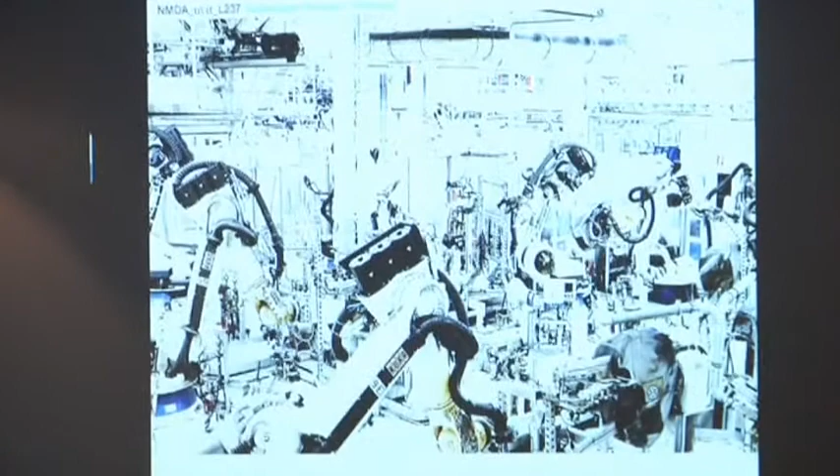Here's an environment, Volkswagen factory in Germany. Think about it. We need to make a car. Here's the series of problems. We have a whole series of machines designed to be able to essentially take care of one element, and it's an incredible landscape. It's almost as crazy and complex as an urban environment. So this is technology deployed to be able to fix or solve for these issues.

Frank Stella, you may know Frank Stella, a famous New York painter. In the mid-60s, he and a number of other painters decided to shape the canvas. And this is the era of canvas shaping. Why did they want to shape a canvas? Well, history of painting was always about the window, and whether it was even representational or abstract, canvases were usually rectangular at some level, as we know. So Frank Stella said, what is the way in which we can make progress in painting? Well, let's get rid of the rectangle of the canvas, get it out of the idea of a window, and make it an autonomous piece.

Culture didn't ask Frank Stella, would you please shape the canvas? It was a problem of painting, and problems of painting have persisted. We don't really know if culture continues to ask painters to paint. I think painters wake up and they paint. Architects can wake up and do architecture. You don't need a client to do that, but there's also this idea of demand involved in architecture. Give me a problem, let me try and deal with it. I think there's a lot of shaping the canvas going on in architecture. And when you sit down and do your projects, you're shaping the canvas too, because you're inventing ideas that culture didn't ask for.

Steve Jobs, you know Steve Jobs. How many read the book? A lot of people read the book, Reality Distortion Field, right? They walk in and go, Steve, should we do market research? He said, hell no. We don't need to know what people think they want. We need to do what we want. And then that's going to create what the world wants. Now that's a pretty strong kind of position. Architects can't be quite that visionary because we don't mass produce products.

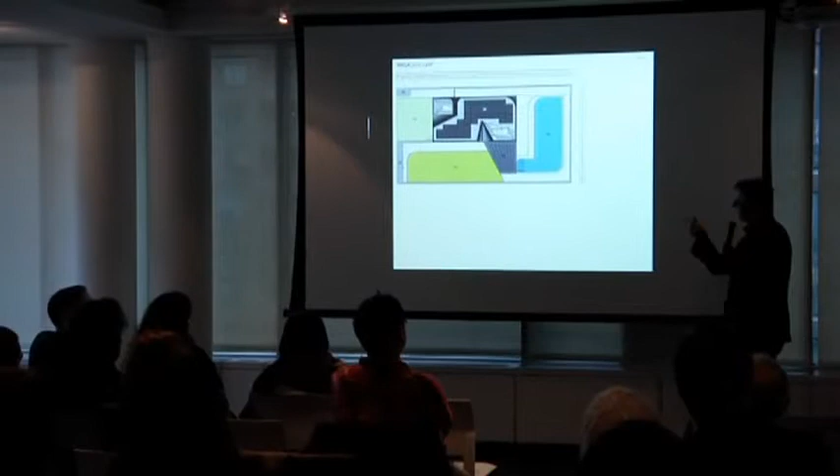Swimming pool, they do their laps. The green bit is actually like a little mini soccer field for them to play soccer. The dad is obsessed with golf. He chips his golf balls and so forth. So that's the roof plan.

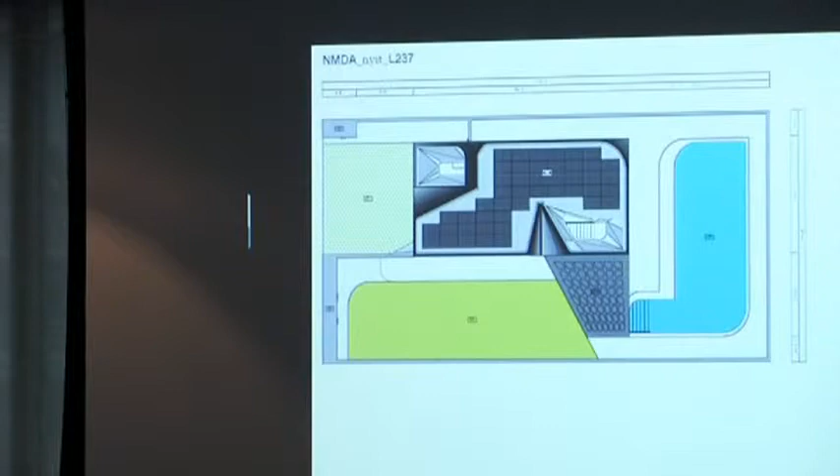The project became a meditation on this small footprint house, 28 feet wide and 30 feet tall and 68 feet deep, and essentially how to carve out as much density and complexity in this house, but really focus on the idea of a window. A window in a surface rather than the idea of a curtain wall or something that's essentially about letting the landscape in.

There's a great view over that wall. There's trees all around except in the back. It looks across a valley to the Getty Museum. Really, really beautiful. Facing east, this is the south facade, and you can already see that we're working essentially with a kind of a carved box mass. And the meditation is on how the windows work in frame views, let in light, both on top and in every kind of facade.

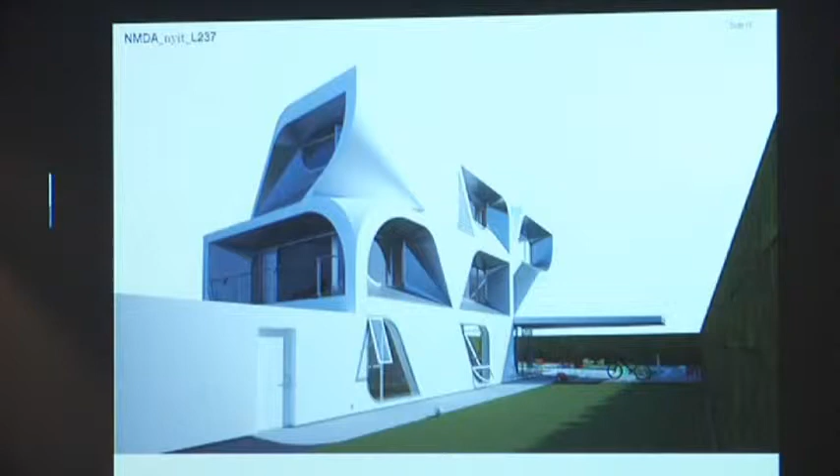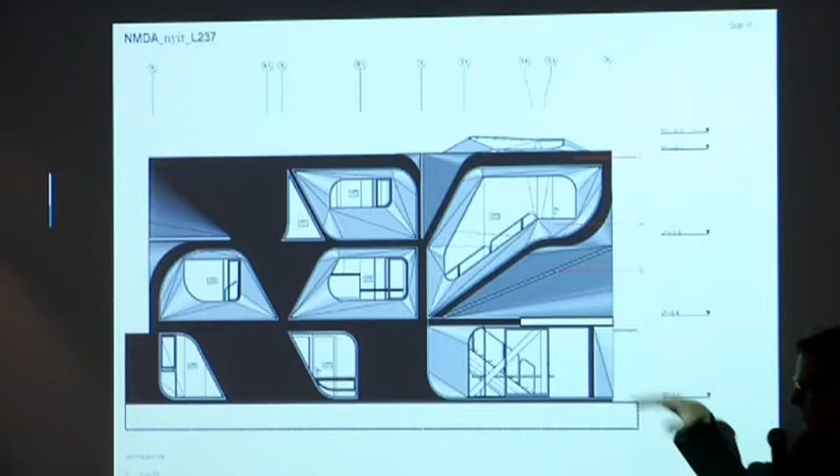And you see the shape of the windows, and the windows in this kind of pockmarked surface are actually smaller than the surrounds of the project. So the impression visually is we want this to seem like the perforation or the aperture in the surface, while meanwhile it's much more limited. So essentially we're opening up the surface of the house, but we're not glazing this area. This is a perforated aluminum rain screen, and I'll show you what that looks like on the inside.

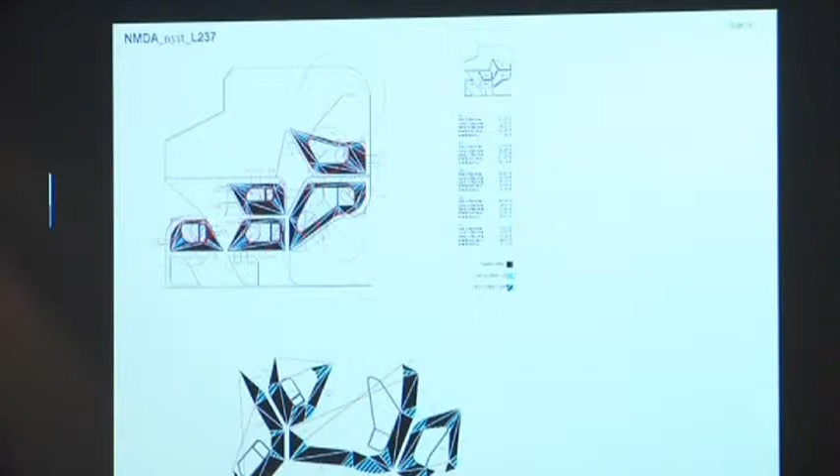The section is the public space on the first 2 floors, and then it simply goes up into the 3rd floor with 3 bedrooms, 2 for the kids and 1 for the parents. And more details of the facade. This is a challenge on the level of structure and framing. There's a lot of steel in the walls.

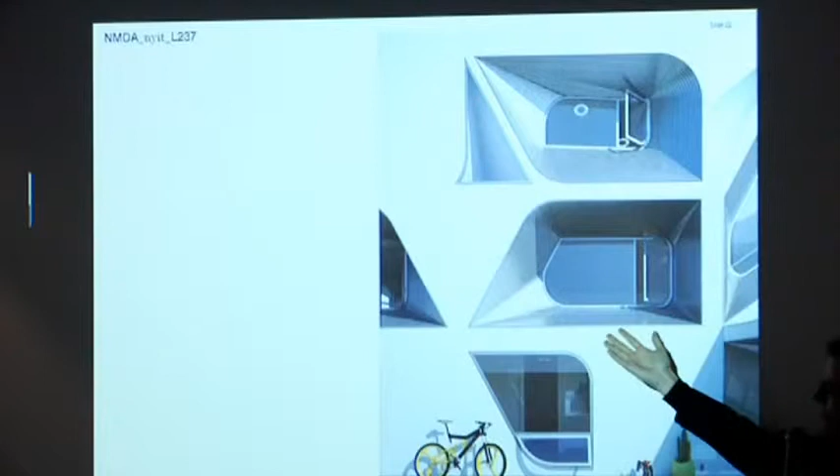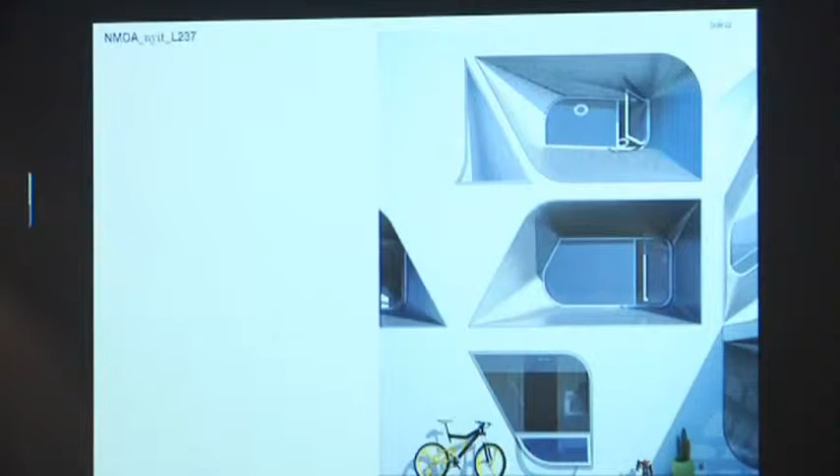The walls are still relatively thin, as I'll show you, but most importantly, it's the relationship between these apertures, the geometry of the apertures. You can also notice that we're working with developable surfaces. We've only got partial conic surfaces. There's no 3-dimensional curving surface, so we can actually fold this stuff out. The main structure of these window surrounds is sheet steel in a wall section that we borrowed from SANAA in work that they've done in Japan. Very, very thin walls. There's a view of the house.

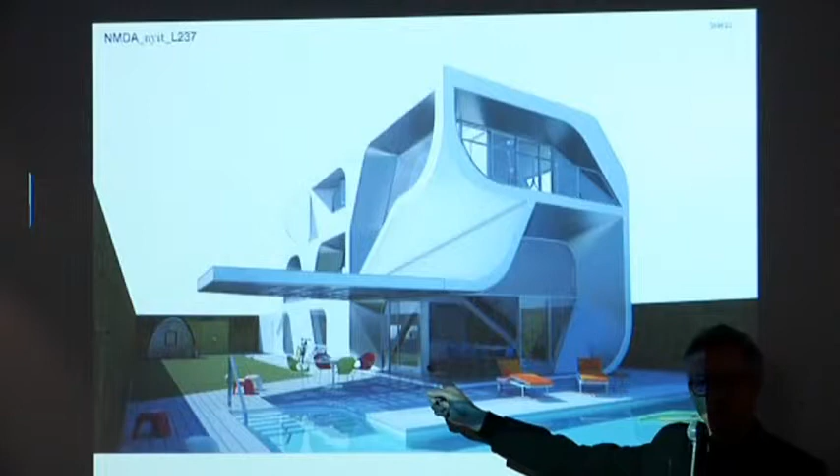So the whole composition of the project, especially here, here's the little micro reference to the glass house as it opens up to the swimming pool. But then the glass house morphs into essentially a window or a partial window that is itself very similar to the windows that make up the rest of the house. So we're really working hard linguistically in the idea of opacity, transparency, and orientation of view.

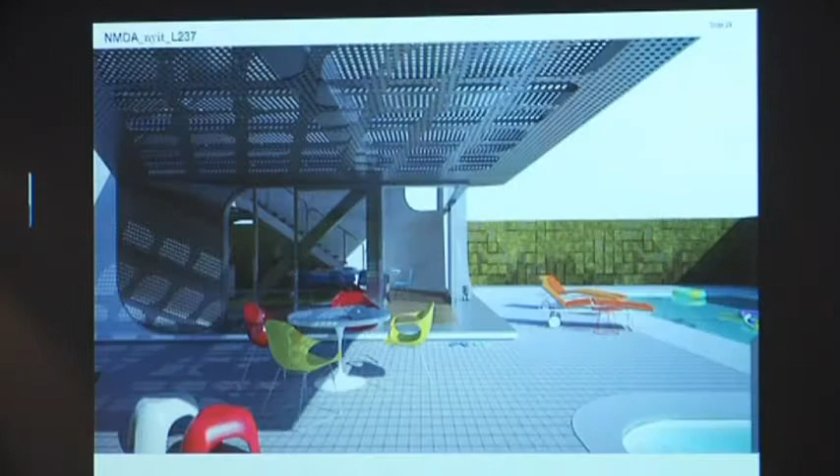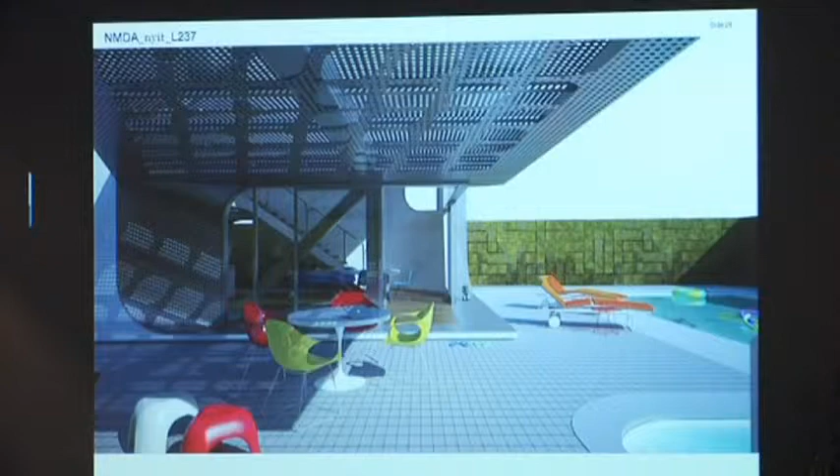That's the parents' bedroom looking out to the east across the canyon to the Getty. You see the bits of life, the MacBooks, the flip-flops, the Gundams, everything floating in the swimming pool. This is what their life is like. Yes, it's a life of privilege, but at least we got them away from a huge 5,000 square foot house. It's really important that we made this smaller footprint project for them.

And views around. This is the interior. That's a stair that goes up to the parents' bedroom. You can begin to see that even though the house is very much like a Japanese house, it's really squished. It's got hardly any void in it. There's a small void, a 2-story space out to the swimming pool.

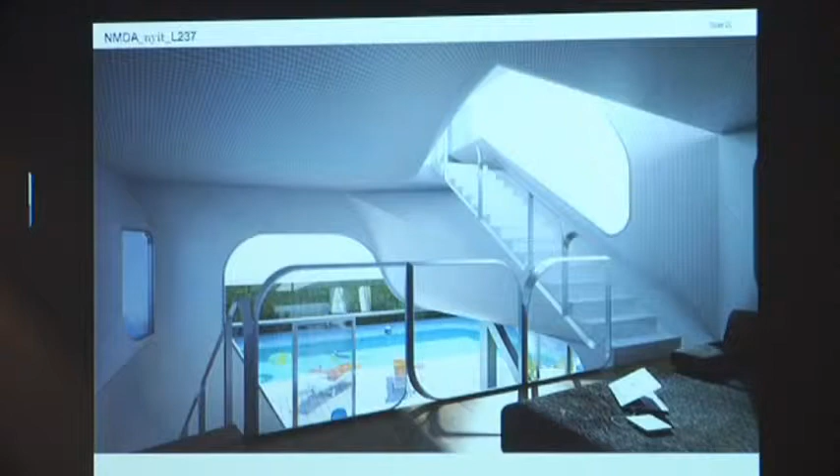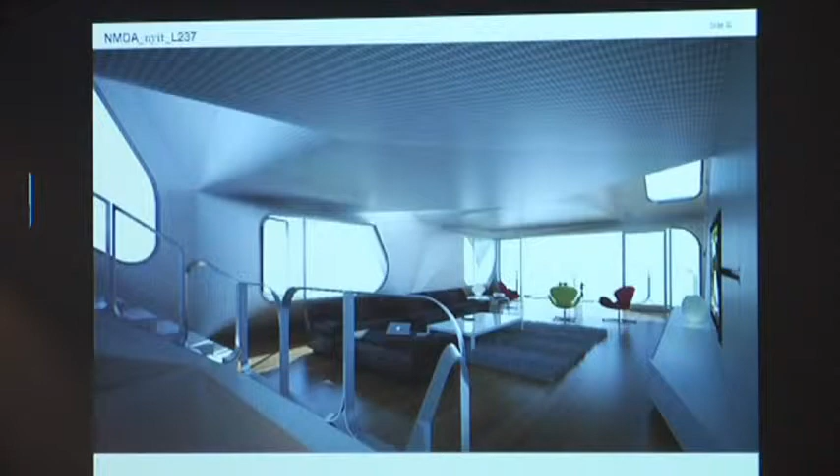But the main thing about the interior, there's the middle floor, it's just a simple kind of public space, is that the morphology of the ceilings and the walls, creases in the ceiling that actually let in a kind of clerestory lighting. And you can see here for the first time that this house actually isn't thick walls, but it's a WYSIWYG, what you see is what you get project. It's not poché, and you can see that really clearly here. So the windows become a kind of impression in the interior, an event, something that's very much bodily engaged.

We had the volume to be able to do that, and essentially create this house as I think effectively, the idea of opacity and enclosure and shaped windows, which are very specifically oriented toward views and letting light in to the house. We even designed a little storage unit mimicking the house for all of the keys and stuff that you usually lose, that sits on the counter in the kitchen.

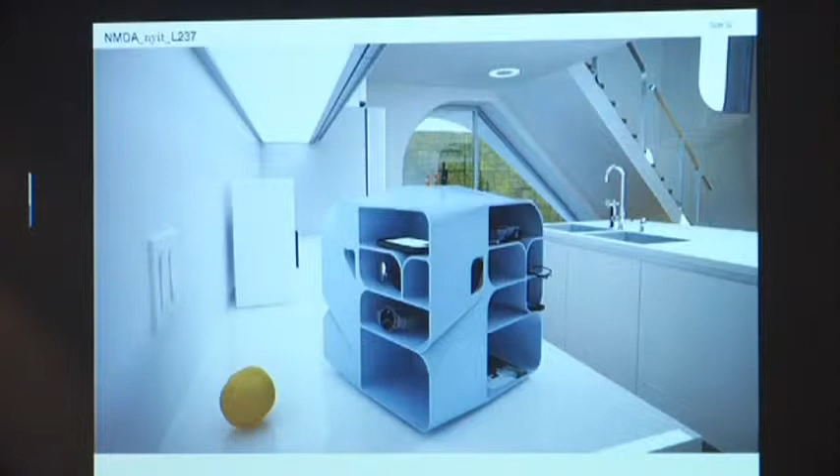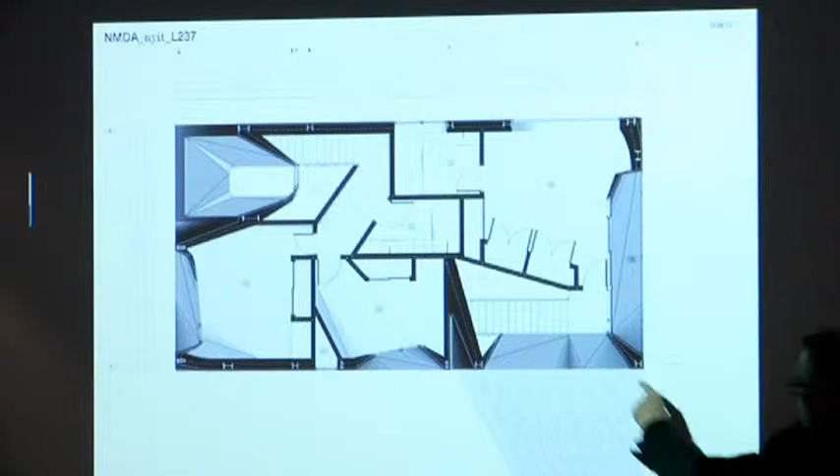And the floor plan is very Japanese in this sort of sense of economy. It's just simply packing the 3 bedrooms and 2 bathrooms up with 2 voids, small voids, towards individual stairs that go up into each end of the house. And there's a view sort of on the center line looking back to the stair down to the 2nd floor, and that's the master bedroom on the right.

Problem number 2, modernism, how to deal with the request for timelessness. Every client, in one form or another, always asks me at some point in the process, how am I going to feel about your project, about our project, in 10 years? It's a curious question. And the question comes out of a little bit of fear, and the fear is, we're commissioning you, and this needs to be a really interesting project, but I also understand something about style. And styles, of course, go in and out of fashion, and if you do something and it has style, well, how am I going to feel about it?

Because everything that I can go through in my sort of personal life, whether it's a car or clothes or books, I can expend them. And I can't really expend this project. I'm buying into it. So the sense of forever, in a funny way, it's a wrenching moment. And so when you think about forever, or if you think about style, there's always a sense sometimes I need something that will remain interesting to me forever. And what is an architect to say to that? And I'm confronted with that all the time.

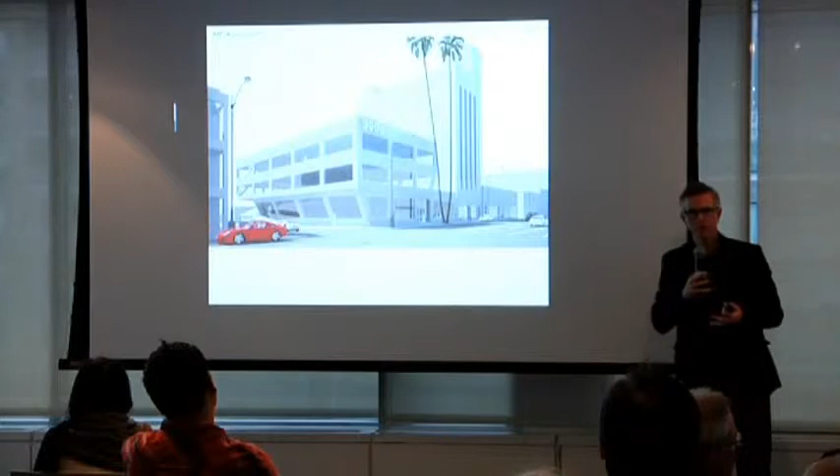So we presented this project. It's shaped by the forces of the site largely because of setbacks, because of conditions of FAR, conditions of the entrance to the parking garage below, et cetera. So this is what we presented, and I was very emphatic about the building being fairly straightforward, fairly brutal in a way, flush glazing, kind of a European project, smooth, Ando-like concrete and so forth. Here you see the cantilever in the back.

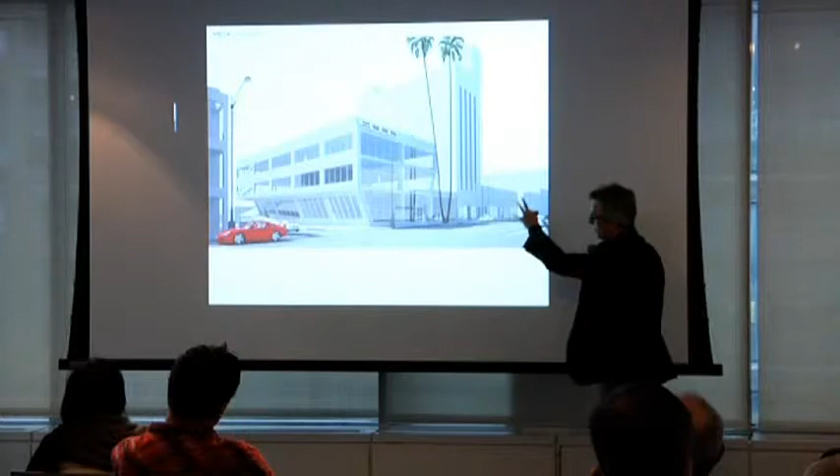And we refined it a little bit as well. Even before we presented the scheme to them, we took out the punched windows, and we were rejected. We were flatly rejected in a nice way. It's too heavy, not light enough. Modernism is about lightness. I said, but we're levitating the... no. Concrete is a sign for heaviness.

We talked about brutalism, we talked about Corbusier and so forth. He said, no, we want the effete steel version of Mies. We don't want the blunt, primitive, heavy version of Le Corbusier, even though they, of course, historically fall into a world of modernism. So we had to turn our attention to office building language that was very, very straightforward.

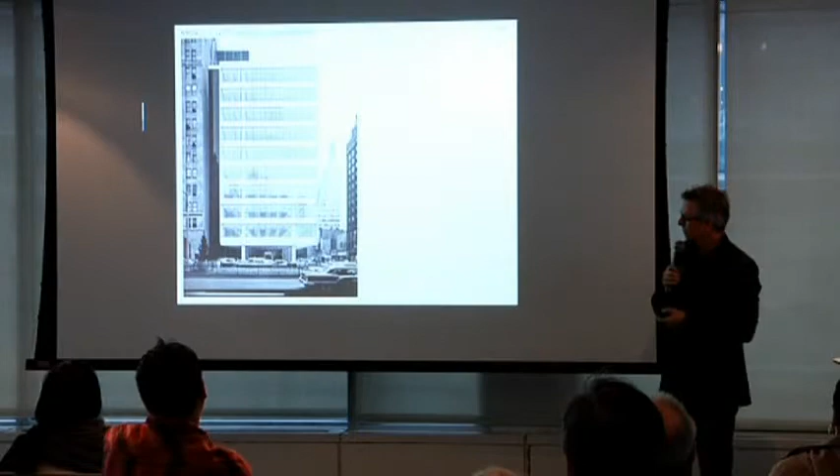Inland Steel building in Chicago, that's SOM 1957. You know this building? Pepsi Cola building at 59th and Park, 1960 SOM. Beautiful project, one structural column bay, equal cantilevers on all four sides, beautiful project. Straightforward kind of aluminum and stainless steel skin with the thinnest mullions and nice big pieces of glass.

Showed this to them and they said, this is what we like. This is what we want. So it began to confirm this issue of the nature of the timeless. And when you look at that, there's the apotheosis of modernism in the sense that all this is a material rendition of the program. X number of floor plate, make the mullions as thin as possible, have glass which is uninflected, and that's about all you need to the project. So minimalism becomes a kind of high art form.

Now we had to look to Mies if we were going to follow this pathway, and obviously to Seagram, where it was clear, and we pointed this out to our clients, the decorative nature of Mies's work. The kind of less is more project, sneaky in its moreness. If it was truly less is more, we wouldn't obviously have the decorative grain, the verticality of the building.

And even though it's a kind of minimal piece of graph paper, the sense that Mies was working on a problem and an obsession, essentially steel, but that it wavered between structural steel and repeating structural steel shapes that were decorative, you've got to believe that Mies was working on the two types of problems at once. The problem of the imaginary and the problem of the obsession, and also the problem of, here's a program, give me this much floor plate, get out of the way and just build it the way it should be.

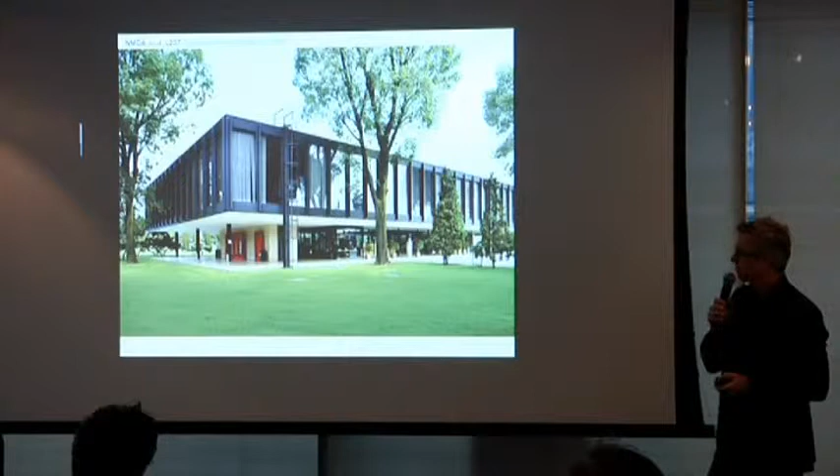Beautiful project, beautiful. This is a lesser known building for Bacardi in Mexico City, also amazing. I love the white soffit. So we took the concrete building, we said, okay, let's just put the glass on it and try that. It was a joke. We sent it back to them and they said, we like the glass more, but the angled walls are a problem. Not timeless. Not timeless. Assigning value to the non-Cartesian of the lack of timelessness.

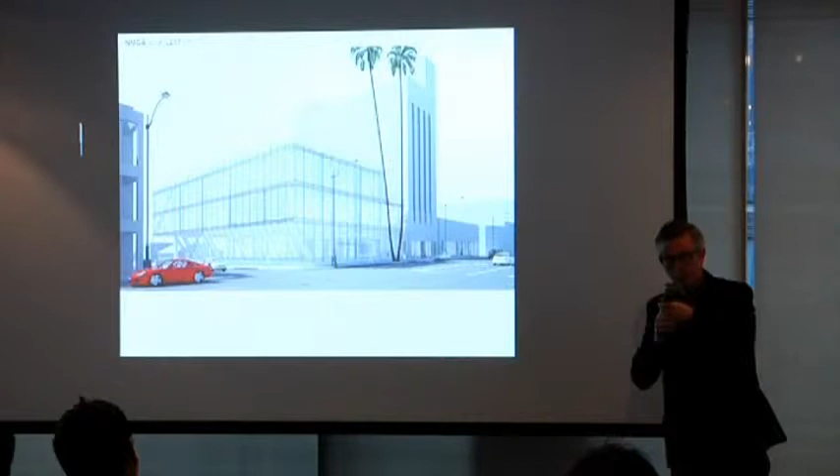A friend of mine said, even you, Neil, you have to face somebody arbitrating something so finely, like you can't just sort of do what you want and everybody goes, that's great. Really fascinating sort of moment. So we get down to this, and it was at this moment in stripping the project down to this point of kind of Miesian clarity, they said, aha, we get it. There's not anything inflected in the project, so we're going to have to pursue the way in which we can make a project that leverages itself between the nature of the timeless and something that's contemporary.

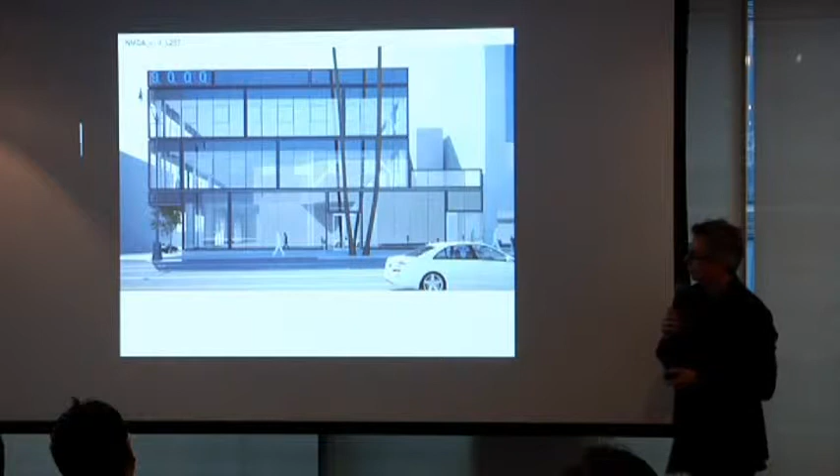So these big glass mega panels, using technology that we learned on HL23, we propose a frame of black painted steel to essentially begin to make the project more graphic and more irregular and not so much about the spandrel. We took another approach in this scheme, which was to deboss or push back the spandrel, push out the ribbon of glass. And by the way, they demanded a 10-foot band of glass. No louvers, no fins, no nothing. Off limits. It's really, really hardcore.

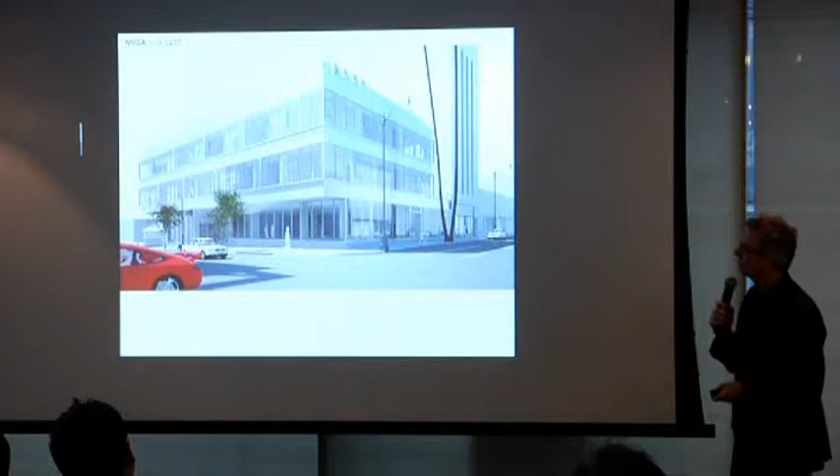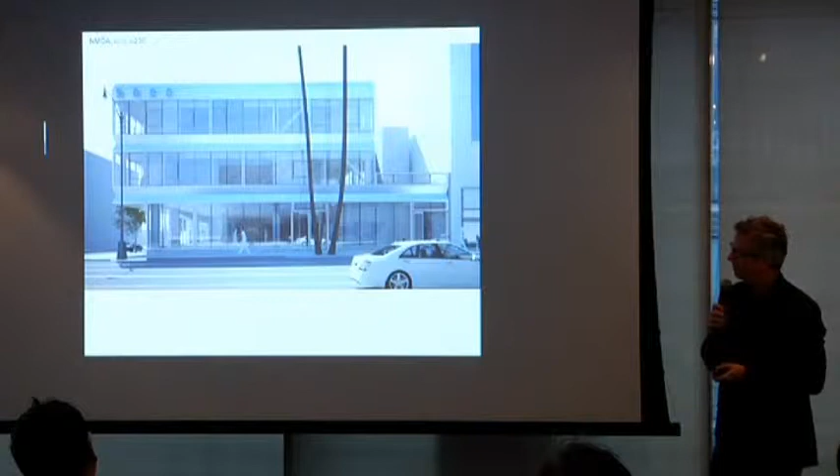And I found perverse pleasure in that because this was a little bit of somebody making a militant statement about design for which we needed to find our ways into the project. We begin to fold the spandrels as you see here and also add some of the things we were doing with the mega panels, and here's the project. So I'll leave it to you. Is this a project for which we add a small trope to the canonical form of modernism?

This is going to be black stainless steel. It's going to be beautifully detailed. And you can see that we're borrowing a little bit of Paul Rudolph in the kind of modularity of the floors because of the kind of creases and pinches within the stacking of the floors.

It's really, in this lecture, which is conversational, for me, I think we're very proud of this project because it's not one that seems obviously in the realm of spectacle that a lot of people would talk about, HL23, the crazy project, the defiant project. Here we were disciplined not by ourselves, but by the demands of the client, and to do it in a way in which we weren't, let's say, negatively affected by the limited scope.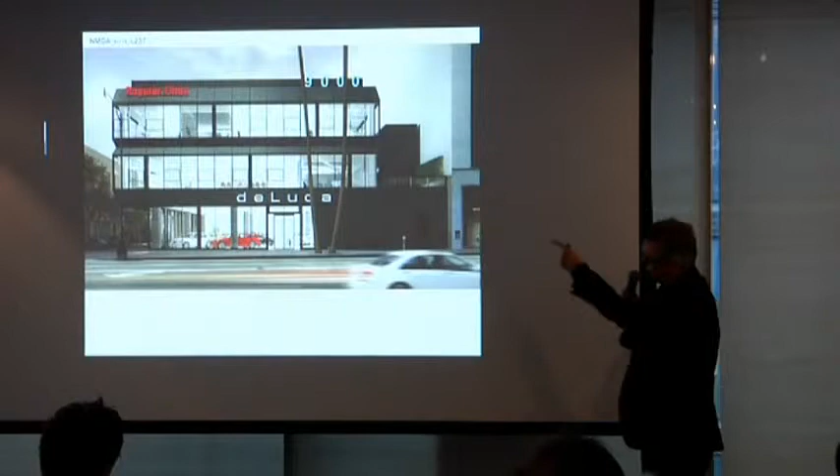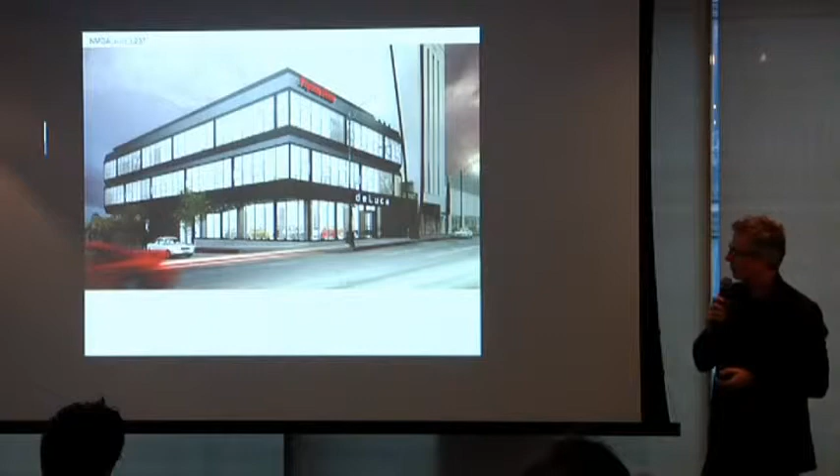We talked quite a bit about the profile of the building in the end. This will start construction in about half a year. We're doing automated parking below as well, which is a nice thing.

Modernism part 3, basically, the pop graphic abstraction problem. Client for a furniture showroom, to go into the client request. He is interested in graphic design and photography and once practiced it and now is a reseller of mid-century modern work. And we had to look at the way in which graphic design, and this is Paco Rabanne, a 1960s fashion designer, treated the nature of construction in fashion. You know, this looks like contemporary architectural facade making today. And if you extrapolate across all these disciplines, there's a lot of things to learn.

So we had to work with his interest in modernism. He sells Zaha Hadid on the one hand next to Eames. And as you know, Eames was always treated as good design and Zaha is sort of flamboyant. Zaha works on imaginary obsessions. Eames fixed and solved problems. And I wish I had a picture of the lounge chair, but you know the bent plywood stuff? Plywood doesn't want to be bent. He had an obsession, he and Ray Eames, to bend plywood.

So again, it was another moment where even architects who claim, I'm just working to solve the problem of type 1, I'm not guilty of any obsession or the imaginary. We're all, and I would say guilty, we're working on it because it's part of it.

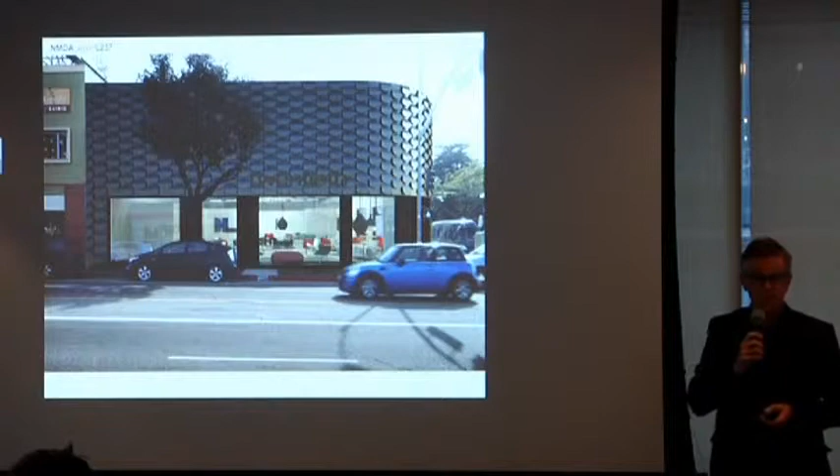Here are some images. This is a bronze aluminum skin, three-dimensional kind of piece, certainly reminiscent of the Paco Rabanne fashion. So here our project is how to not make it be retro and loaded with a certain type of association, but have the kinds of references that our client was interested in, in his case, pop fashion from the 1960s. So we didn't do anything with gradient. We didn't try to mess around with it.

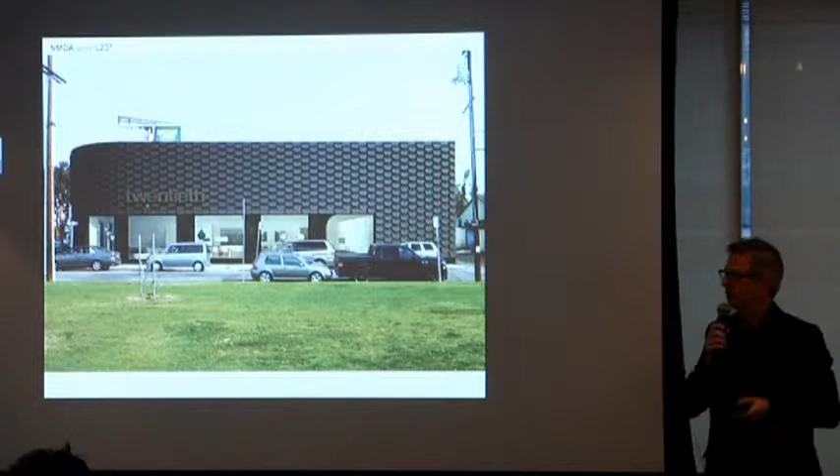We were really straight and very hardcore, I think, about the way in which the pattern works. These fins are Z-shaped and they kind of are cantilevering vertically. They're 3/16 inch, very robust, thick anodized aluminum. It's a big single space on the inside.

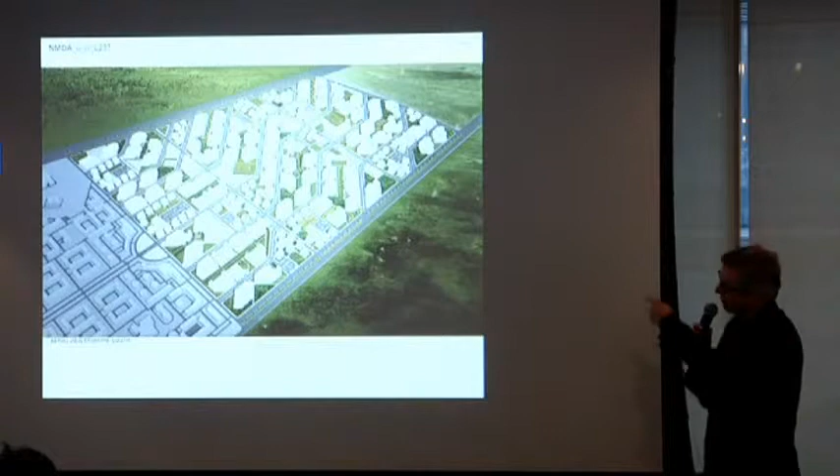How to make a happy building in a desperate climate. We're off modernism, but we're still dealing with the contingencies of clients. We were invited as one of 4 teams to do a master plan for housing for 45,000 middle-class people in Russia, 20 kilometers south of St. Petersburg on a lunar site. It literally almost looks exactly like that site. I'm not going to show you the housing project, but I'm going to show you this kindergarten.

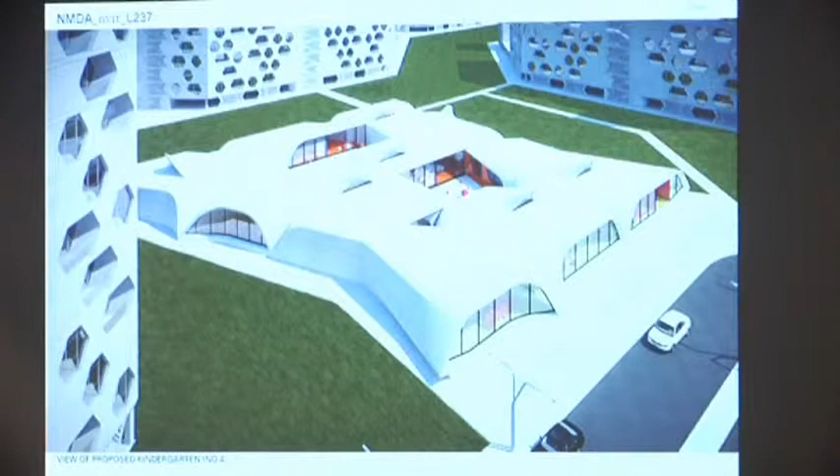As part of the program, we were asked to design one of 7 schools. There were 4 kindergartens, a high school, middle school, elementary school. And so we wanted to play out certain obsessions we had, both formally and materially. This is a single-story building, like most kindergartens. It houses about 110 kids, 3, 4, 5 years old.

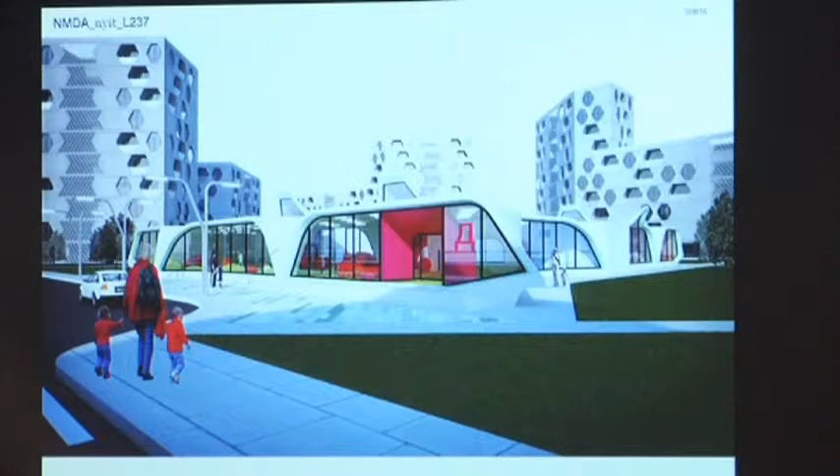And what we were desperately attempting to do was to essentially make a project that rejected, on the one hand, the nature of isolation in this very, very dark and snowy and dreary kind of climate. So we looked to quadruple glazed big pieces of glass. We looked to the way in which courtyards could be used in all climates. I'll show you the plan. It literally is a series of bays of colored carpet with dunes and topography inside, as well as a number of classrooms and so forth with the 2 courtyards in the middle.

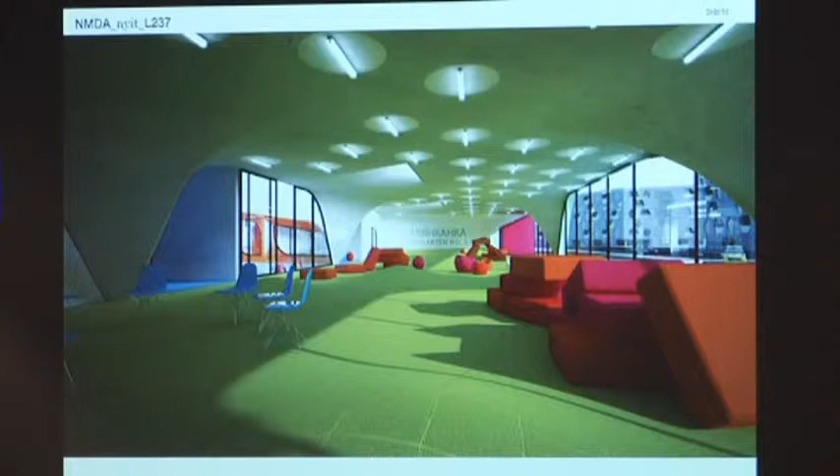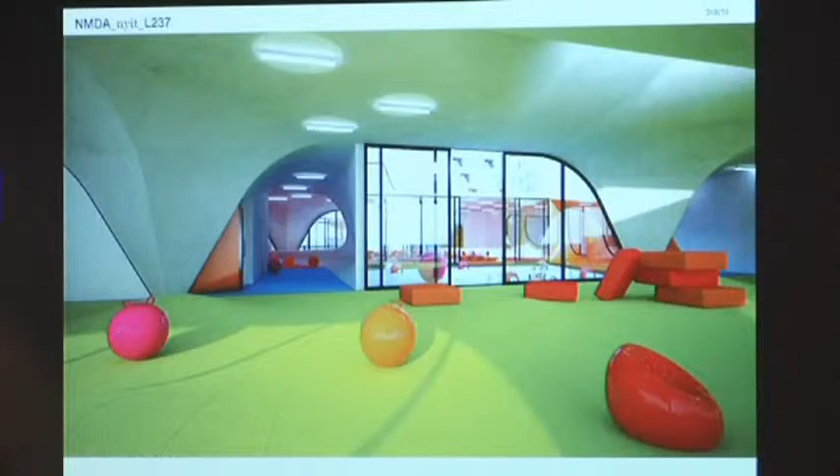I'm going to show you a series of interior renderings. Again, this is the world of children, but it's only the stuff that they play with, the books, the blocks, the airplanes, the cushions, the chairs, and so forth, as we were trying to play out an obsession that we have with objects in space. Here we're looking through this project. So the sense of color, the way in which the structure works in this kind of cast-in-place world where the columns obviously morph into the horizontality of the ceiling dominated by the pattern of the lights, and very large pieces of glass.

You can see a moment where we have an odd piece of glass that's going to actually get filled up with snow. There's heating coils that we proposed on the concrete to drain that out into a cistern. Here's one of the courtyards filled with 4 feet of snow. It's actually miraculously a sunny winter day. So the students can go outside and play and then go back into these hyper-colored corridors.

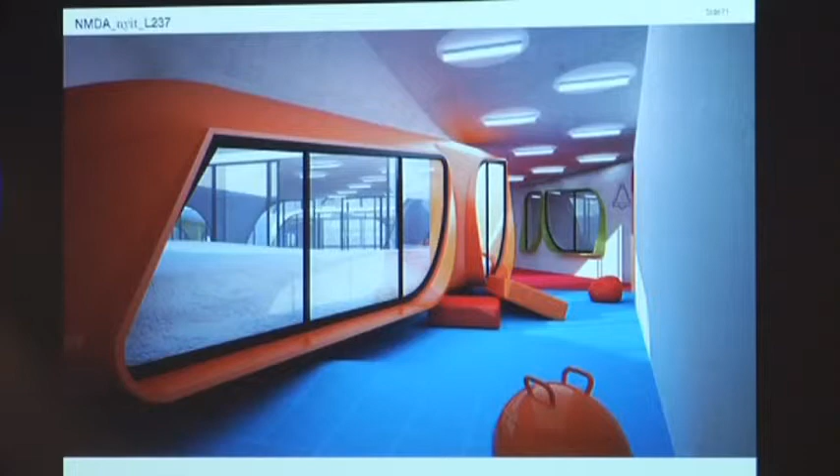And you can see in this particular image, our obsession with the problem of the window continues. We designed this in the same era as the house, and we're looking obviously to the way in which color and the graphic of the frame play out in many ways the same as the house. We're trying to produce a relationship between opacity, perforation, aperture, and almost a Californian openness.

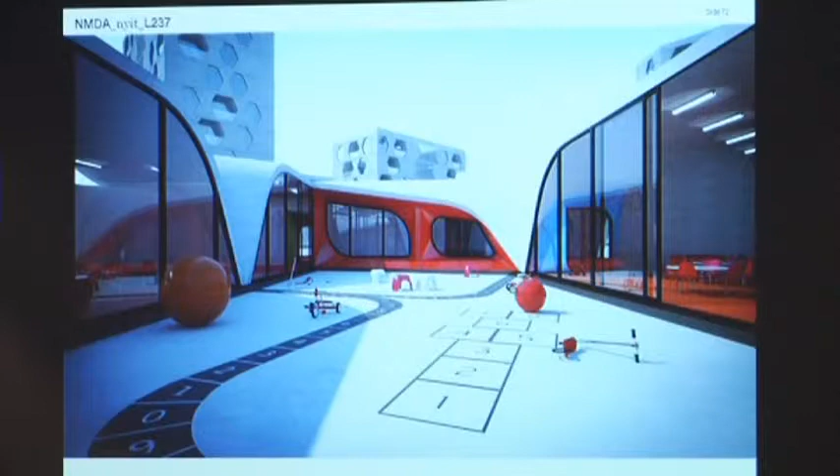This is the dining hall, and these are some of the individual classrooms. In terms of the images, you can see our obsession with making sure that everything is in there. I wouldn't say that these images are photorealistic. I'm not tricking you that this isn't a built project, but the way in which even the texture of the whiteboard on the left side of the room is articulated is very important for us. And the views here.

Very quickly, last one. How to use amateurism against professionalism. I'm really in favor of the amateur and not the professional. The amateur is the one who constantly says, I do it for the love of design, which is really a definition of the amateur. The professional is somebody who gets paid for services. We treat our work as really about the love of design, but in this case, it's even beyond love.

We won a competition with a team in Tokyo to design the interior and exterior of a new airline in Tokyo, well, based in Kansai. You know as well as I do, there's a history to the livery and graphic design of airplanes, and there are styles and there are techniques and so forth. And one here is graphic design that makes the plane look longer and smoother and faster, just like stripes on a car, accentuating speed.

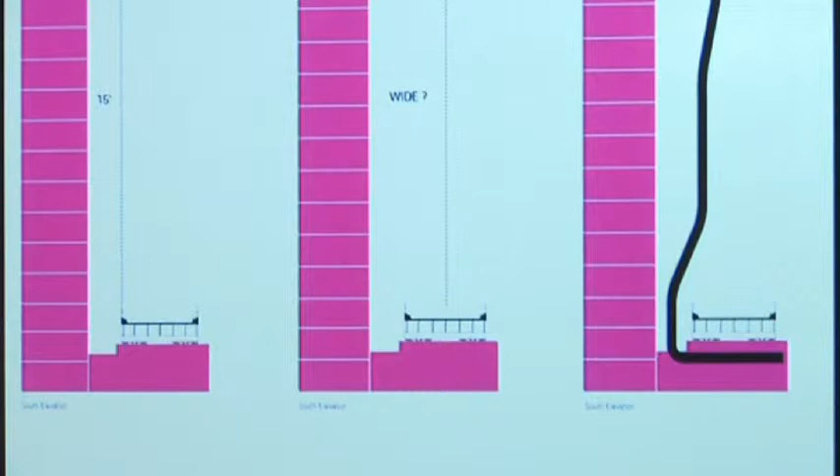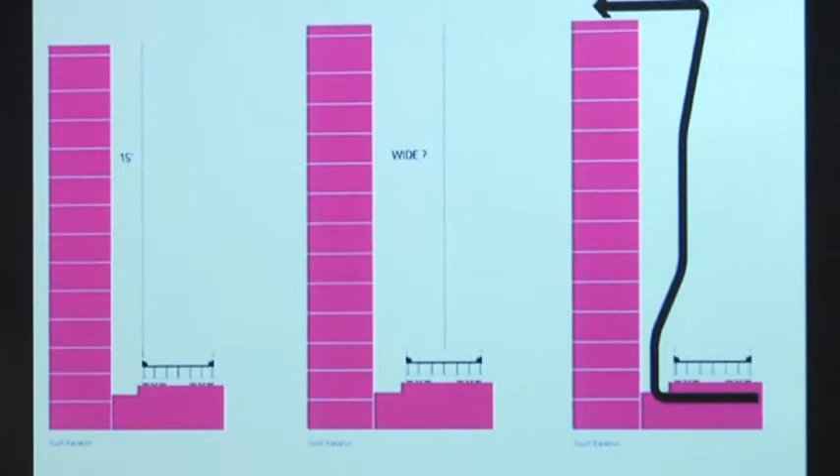There's the zoning on the left for the West Chelsea zoning. This was a 15-foot setback all along the High Line. No structure could get into it. Gansevoort was different. The standard was different. The West Chelsea world is different. So we had 25 feet out of a 40-foot wide site.

Our client said, I need to build a building bigger and taller than what the site will allow. The building is too small otherwise. It wasn't an issue of FAR or floor area because there was already excess floor area that was available. It was literally about how to deal with the zoning. So our question was how high, how wide, what would it be, how would we approach the project?

This is just one diagram. Ultimately, we asked for 8 waivers to city planning. We were granted 7. One waiver was almost like a kind of straw man waiver. And you can see the hatched area on the far left: 45% of the floor plate, the sellable floor plate of the building, is beyond the zoning.

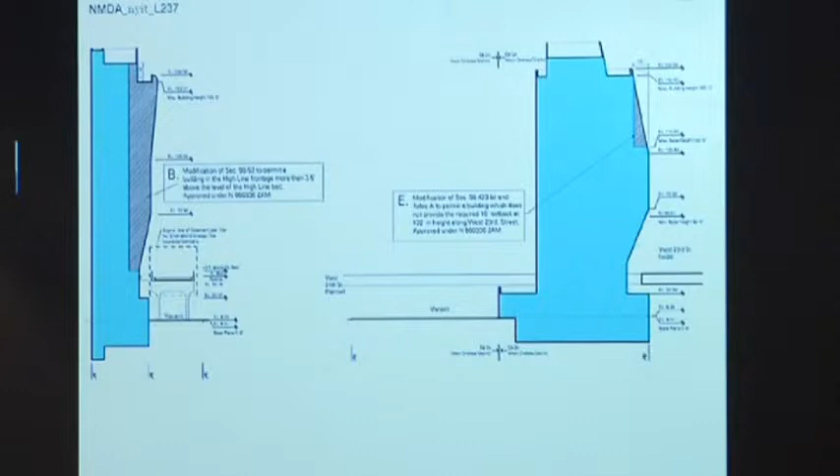And so what we had to do for a year was to convince city planning that the architects weren't egregious, the developer wasn't greedy, and that a project of this type needed to be eccentric and restive and problematic rather than conforming.

And we began in 2006 at the end of the year with TG Nickel. We were working with Bovis before. We couldn't quite pull it together, and fortunately Joe and his team came into our orbit and things clicked right away to pursue this complex project. I flew out once a month for 3 days, made more than 50 trips to New York from California, and worked closely with the team.

We were the stewards of the 3D model. Like all architects now, you have to sign documents that hold you responsible to that. All of these things coordinated with fabricators, consultants and subcontractors, and of course ultimately to the general contractor and the CM. I'm just wondering, Joe, if you want to kind of talk about entering the project and let's say how you guys began to approach it.

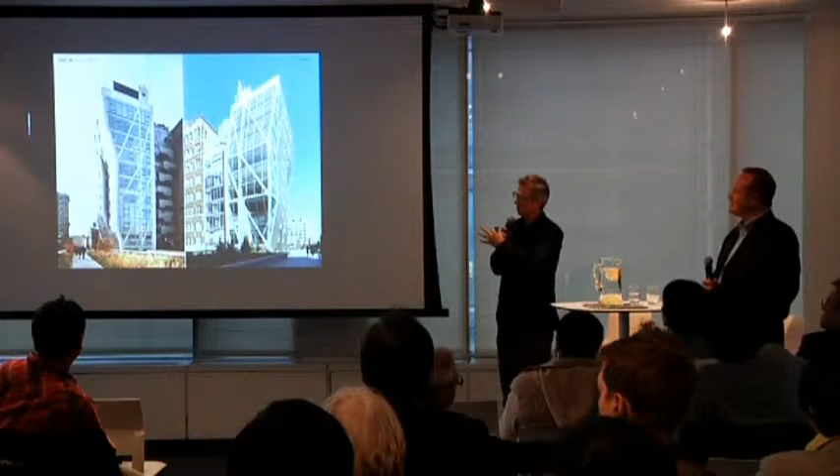These are recent photographs. The profile of the building and how it sort of leans out over the park. The particularities of the facades and the way in which the structure is reiterated with a ceramic frit, which we'll get more into.

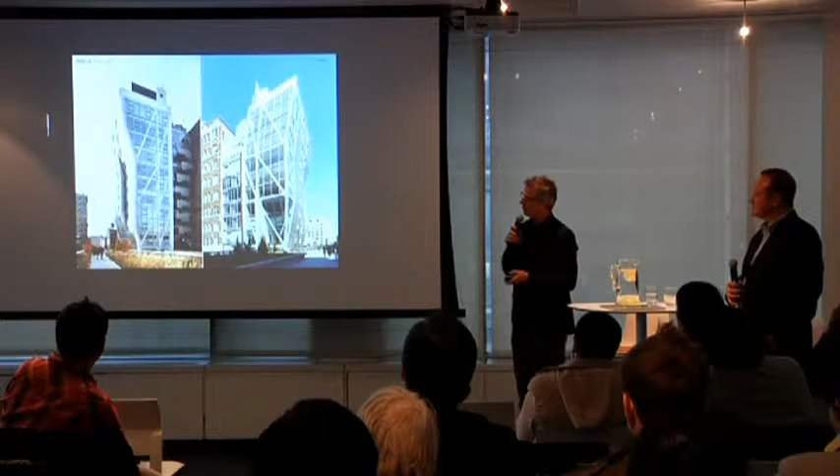The building is a building about the mediation between the two-dimensional and the facade, for which from blocks and blocks you see this building frontally, and then when you move past it, it rotates and becomes a super dynamic 3D thing. So we had a lot of optical things going on in the project.

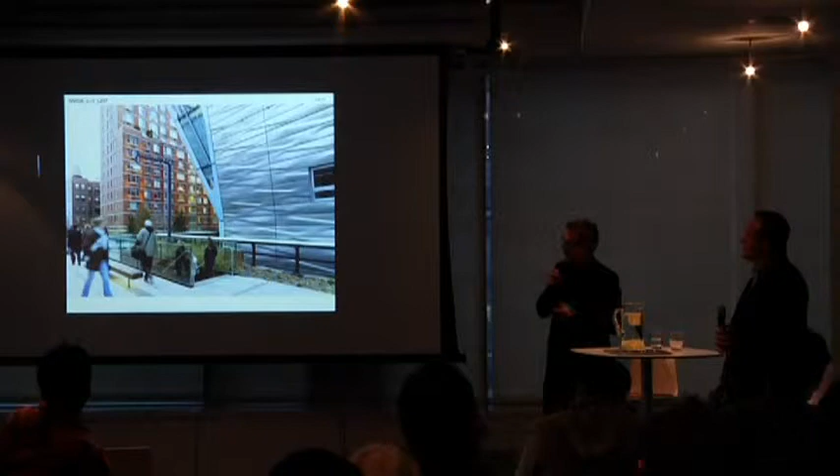So the luck of the site and the way in which the building essentially is experienced and interfaced at this particular level, 25 feet in the air, where if you're walking on the street, you're typically seeing storefronts and signage and so forth. And here you see pure geometry and pure materiality, really, I think, at its best. The building is standing out and fitting in. Sometimes it's just a background and people don't see it or care or notice. On the other hand, there have been a lot of photographs taken of this building as well. Here it is also in context.

Look at the lines. I mean, every picture that you see, how parallel the lines are, and the 3D modeling, and so many references. We can go on all night about it. The 3D modeling helped so much in the engineering of it and the construction of it, and that's one really nice element of it. Yep.

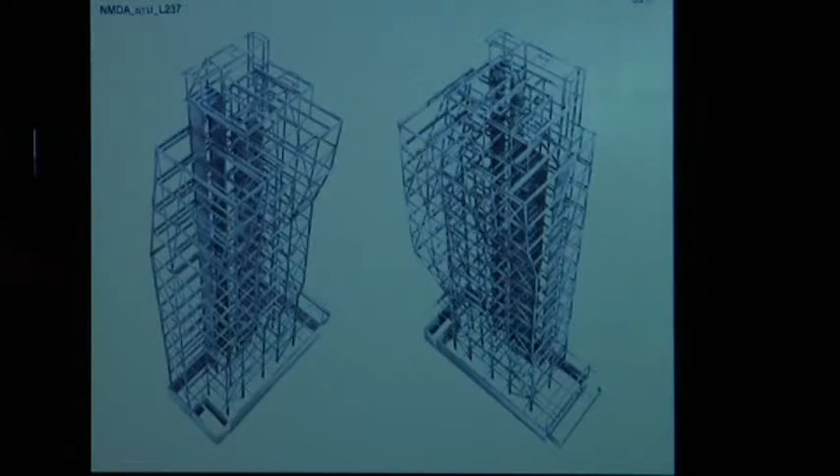Okay, so I think we're going to get into more detailed process of construction, and I'm showing these renderings of the steel frame, but basically, Joe can kind of talk about the relationship between the structural engineer, us, and the steel fabricator in their office, and how this, before it had gone to site, was getting coordinated.

So, as often happens to you professionally, or what will happen to you when you get out into the world, students, one of my favorite stories early on in the construction, and this is another great facet about the developer, getting the construction manager onto the team in pre-construction. So we were involved very early on. Documents at the time were probably 50–60%. And we go into a standard pre-construction meeting.

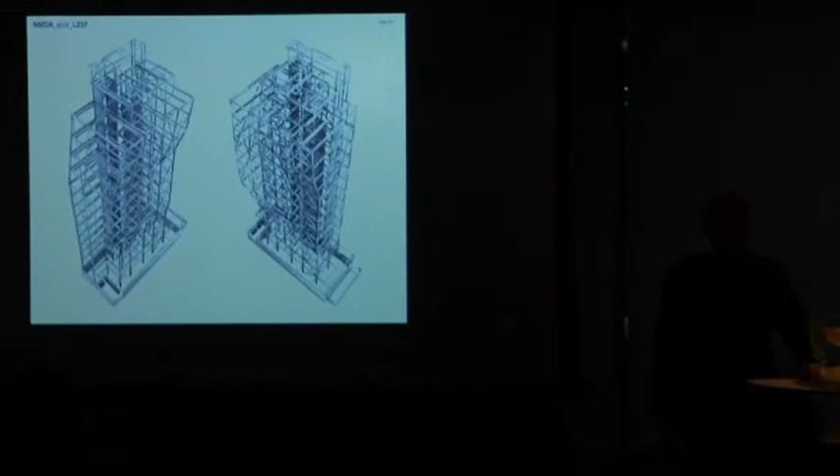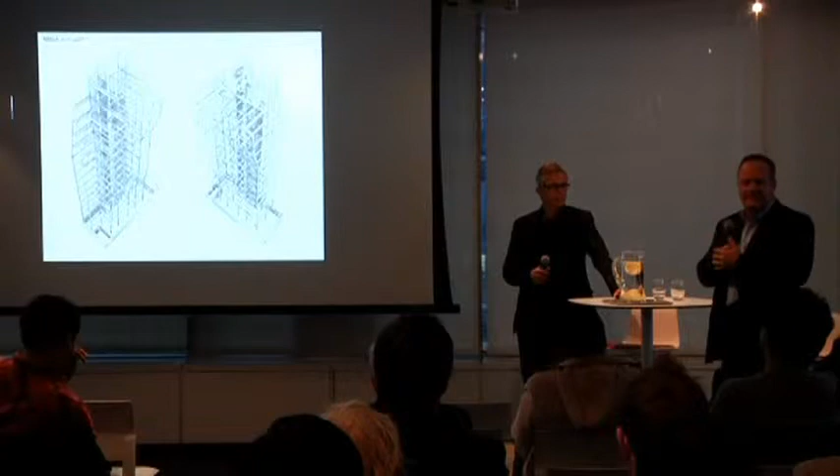The architect, Stefano, and curtain wall engineer, structural engineer, comes in, and he was a pretty pale guy to begin with, but that morning he comes in and he says, well, I just want to let you guys know, no pre-warning, that we've done some early calculations, and the building, as you can see, you don't have to be a scientist, the building wants to lean over 2 inches over the High Line, both in the south and west directions. No matter what steel plates we can put in the building for the shear wall, it's going to be into the curtain wall. And the curtain wall already was being engineered, again, from a budget point of view, as I mentioned before, and also from a design edge point of view.

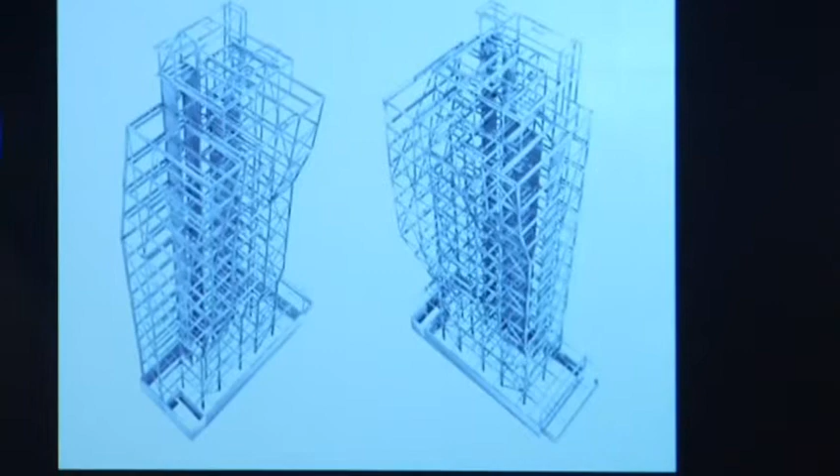The wall panels were procured from China, mainly because there's no company in the U.S. that would take on such a challenging project and such challenging wall panels. Other panels were being procured from other parts of the world, and now we had to deal with a structure that would be leaning into the curtain wall.

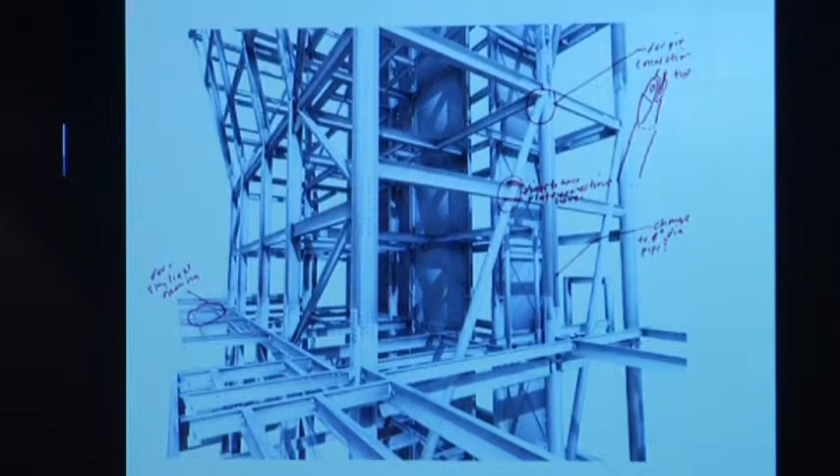And of course, we got this detailed model back from the fabricator, and we're making notes and things like that. So this image shows marking up things. There's still the idea of the eye and the hand going into a critique of what otherwise is digital. And here's an image of our compiled model where you see every element in the project, basically, in terms of the envelope, et cetera. So this was our working point, basically, between everyone.

Yeah, as I mentioned before, the 3D model became so important because basically we were able to look on with the architect, the engineer, and designers, what conflicts we were going to see going up the building before we actually came upon that problem in the field. And it worked flawlessly. We were able to hit every conflict in engineering and design the steel where we needed to, design it to tuck it in, to make sure that there wouldn't be any conflicts.

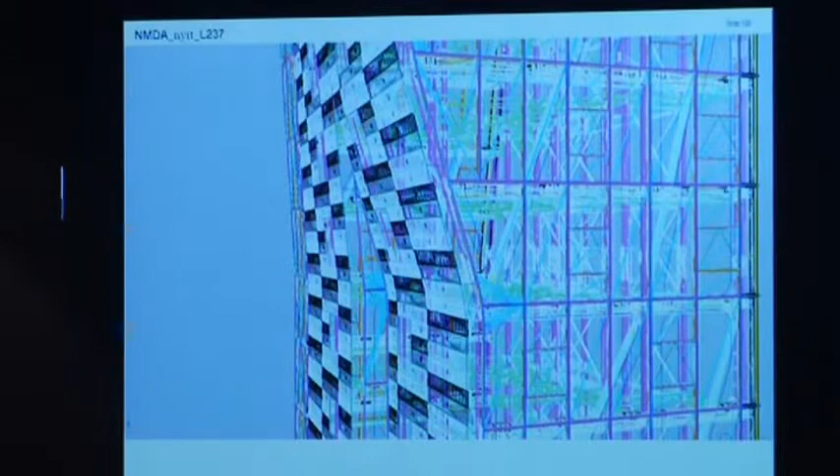And one interesting thing, something I never did before, we actually had to hire on a separate engineer during the process to camber the steel. You've all heard of cambering, and it's usually on horizontal. We vertically cambered the steel so that the building would go back to a 0 resting position.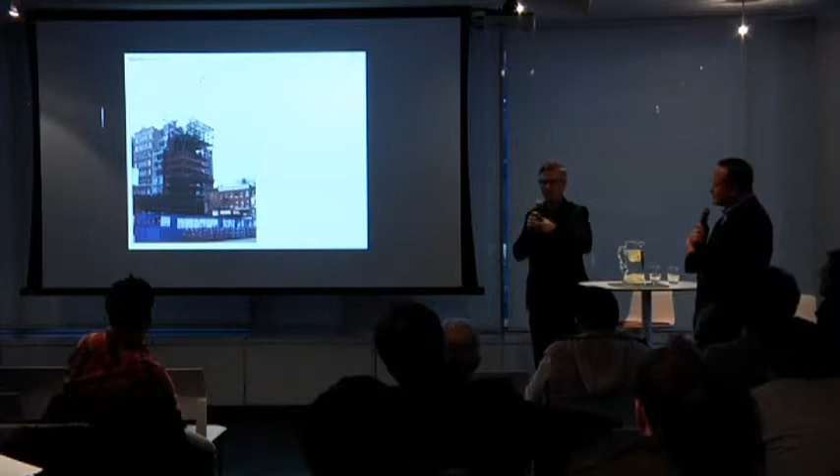And do you want to talk about the guy cabling going on in the structure? Sure. Similar, and I'll make a reference also for those of you who know the federal courthouse, when we had a similar problem out there with the rotunda, where there were a couple of engineering items where we lost tolerance in the curtain wall. We basically had to guide it in by hand, by eye. Here, we actually had the benefit of 3D modeling, 10 years later in technology.

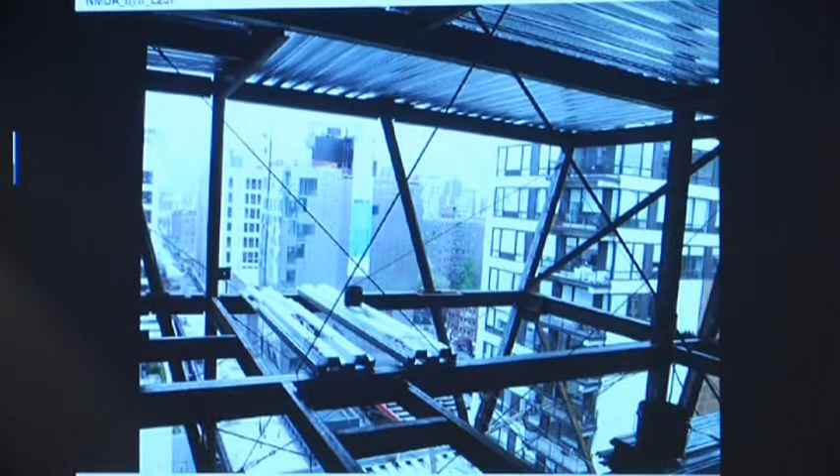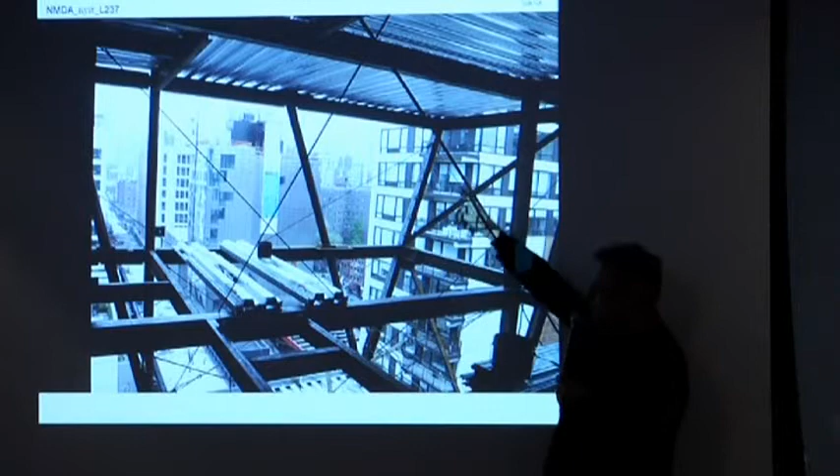As Neil mentioned, we actually sectioned the building up 4th floor, 7th floor, and up, and basically had to do a precise survey every step of the way. So the amount of guy cabling, as you can see in this picture frame, everything pulling back to the west side of the building. This is where the cambering was going on. You typically camber a beam so that when it's loaded, it gets back to horizontal. But these columns were pre-stressed basically, so that the building, when it was finally loaded, would quote pop into place.

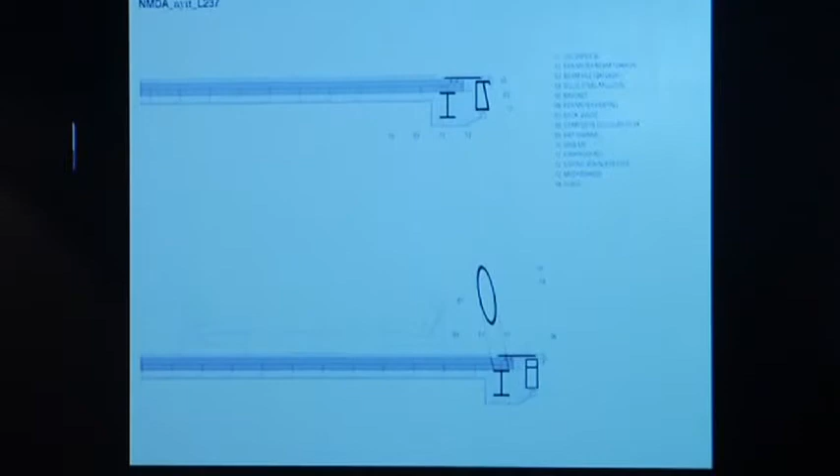Here's a section of the south facade, and the one thing to show is there's no spandrel glass in the project. The glass panel goes from floor to floor, and you'll see how that works. But we've got almost like a redundant structure. The darker tubes are part of the prefabricated glass system, and then the steel frame you see behind. Yeah, do me a favor, just go back to that again, because I want to point something out as well. Something my partner always teases about. It's a steel building without any steel in it.

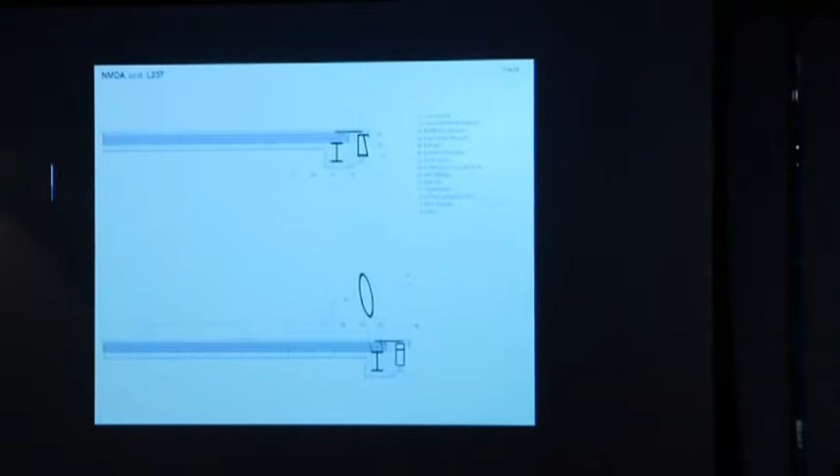One of the design things that actually came from Denari's office was we can't have that beam in the living room. So as you see, there's no beam right there. There was a beam in the original design. That couldn't interrupt that ceiling. So they took the beam out. What do we do? Well, we have to shore, much like a concrete job. So this is a regular steel and deck job, poured concrete floors. We had to, in the living room area, all the way up, basically reshore the job, make sure that we get that steel beam out, and here we are.

These are images of the factory in mainland China. Our team went, I think, a dozen times in terms of man trips, and Neil's office and team also did. And you can see the way in which it's produced. And here's the precise and imprecise and the handmade and the digital. These are all welded steel frames. So of course we give them exact geometry. That's an extruded piece of steel, but in a factory, a guy is flame cutting a piece of steel, putting it on a jig and welding it by hand, just like anybody in a kind of craftsman office.

And the glass was also so big that they didn't have an autoclave to put it in, so these units had to be essentially laminated and sandwiched together by hand as well. So we stressed out their capabilities, which is why we went over so often to check on the quality and the craft, because we were pushing it.

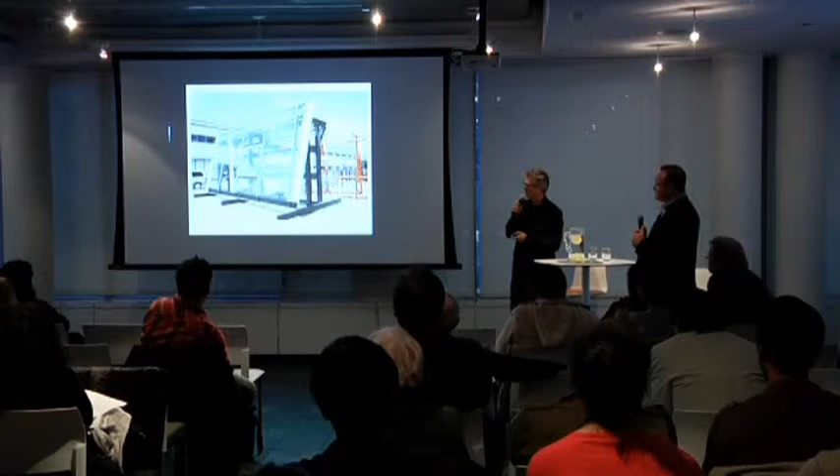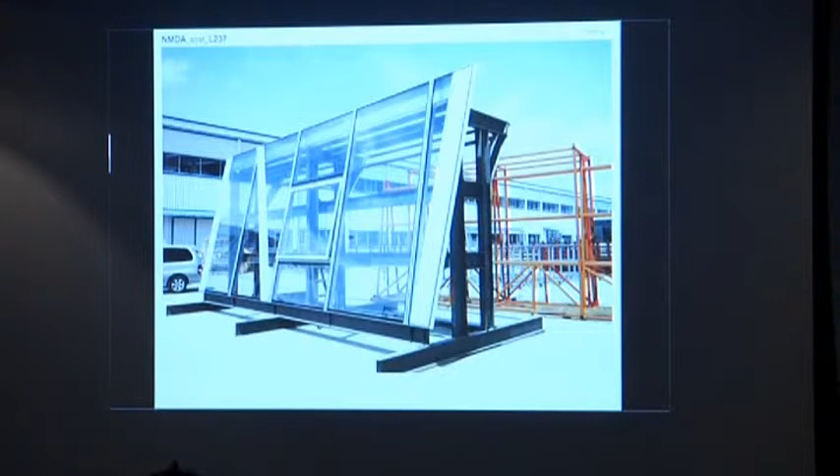And this is the first, this is not a mock-up, this is the first what we call a glass mega panel, and there were a whole series of them, of course, in this atlas of panels that glazed the project. And I'll just point out, here's what's called a spreader beam, and this beam essentially allows the verticals to be welded to it so that we can make very small joints, because there's no movement possible between the pieces of glass, no racking. So the joints can be very, very small. So not only do we get the benefit of prefabrication, we get the benefit of very thin profile joints.

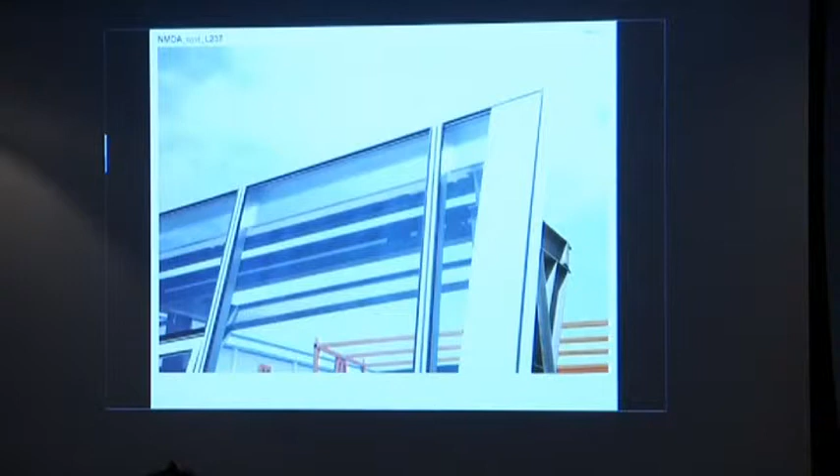And all of the steel from the frame is wrapped in bead blasted stainless steel, so it's quite an elegant piece. And here they are attaching it to a frame, and then these pieces have to go into the open shipping container and shipped, and they ultimately went to Long Island before they went back into the city. You went to China. Yeah, a couple of times. Yeah.

I liken it to like an Italian sports car. There's a factory. You can see them being made, you know, sort of like a factory, but really they're all handmade in the end. So this relationship between digital fabrication and the artisanal nature of construction was really part of it. And now we're going to talk about the stainless steel panels. That was a real curious set of problems and pleasures to work on.

This is a photograph from London Terrace across the street. We built a number of mock-ups. This is in the shop at UCLA where I'm a professor. We built this with students one summer. And here are the dies that were first made and milled. Took a lot of days to mill this, and these were even before they were polished.

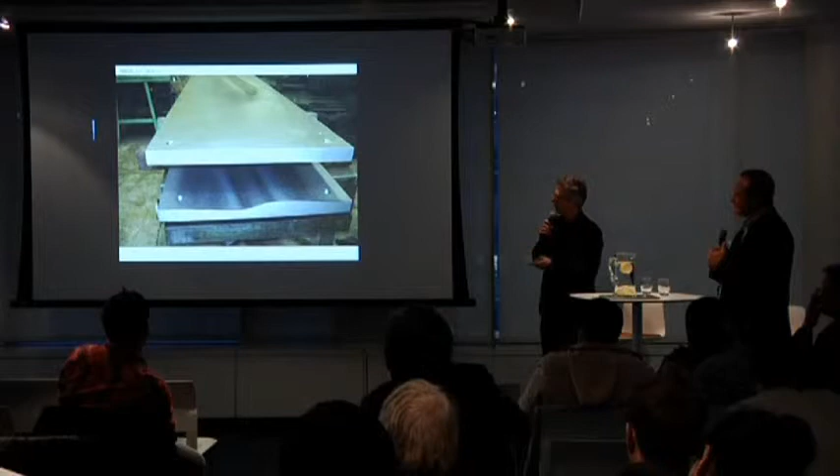And this is the first panel that came out, and we had some problems with what went on. Do you want to talk about the springback problem with the dies, and we had to remill the dies? I don't, why don't you speak to that? Okay. This was really the first correct panel, but these dies, just as a kind of anecdote, we gave them digital geometry, they milled them. It took something on the order of 30 days on a mill to mill all the pieces for the 3 panels.

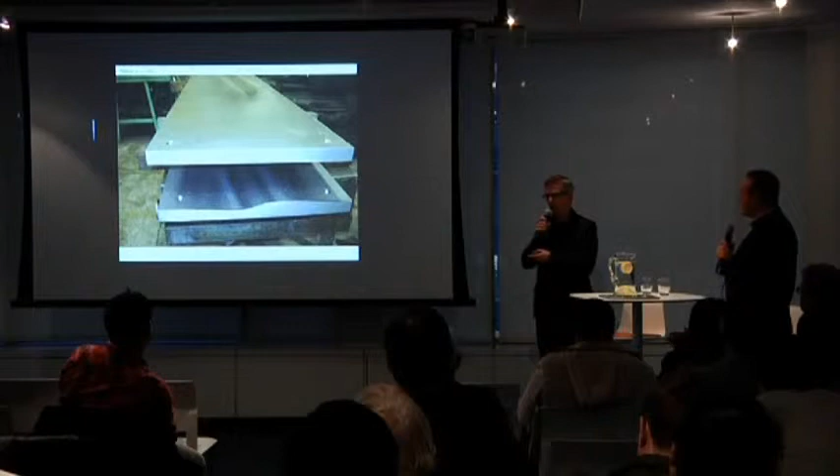We put them together, we made the first panel, and the shape memory of the stainless steel happened where the form wouldn't take all the way. So we had to go back and actually re-mill the profile of the shape of the panel, but we didn't have a new model to give them, and we went down and we guessed how much we should take off, literally like a haircut, to be able to make the panels snap into place.

there were several renditions, and I didn't want to speak to the design aspects of what was right and what was wrong, but the quality control we knew was going to be an issue. Sorry, this is in Buenos Aires. Yes, in the factory in Buenos Aires. Right. So we knew we were dealing with a small international artistic company. Again, budget reasons. The developer, I forgot who found them. Do you remember? Front. It was Front. Okay. So the exterior wall consultant knew of this company, and we saw that there was going to be a serious issue.

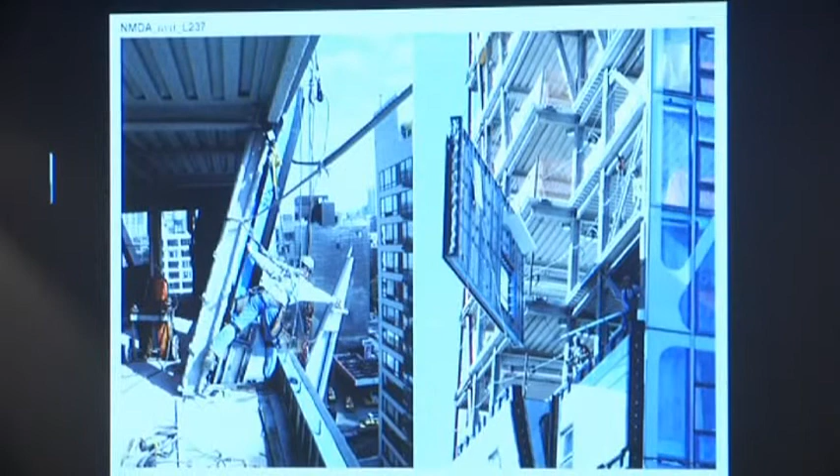And one of the things that we really had, and I tried making happen, and it did happen, is took on a young guy, aggressive guy, a proud guy who was one of the sub-foremen out in Island's shop. You could just see the smile on his face, and he came out into the field, and it was really a big component of how the erection and the setting of those wall panels went. Because here's a guy that took it from all those raw materials, put the components together, and then managed the installation as well.

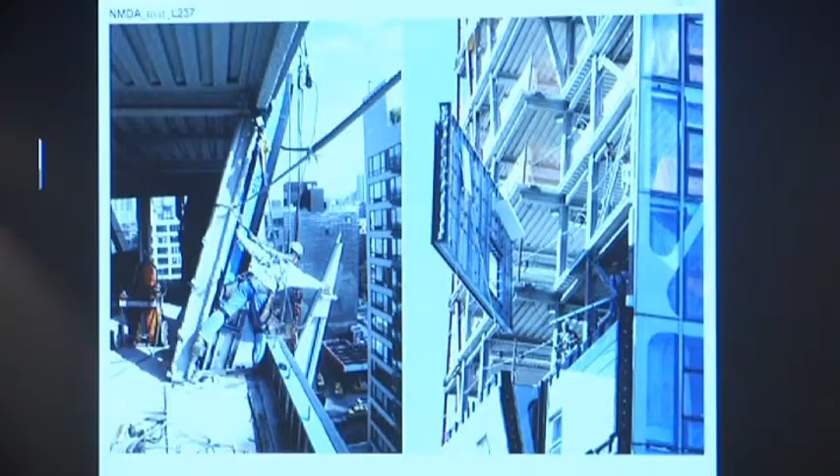Thank you. We'll have time for some questions. Are there any questions for our guests? Yes. What was your inspiration for those buildings? Hello. Hi. Just wanted to find out, what was your inspiration for the building?

I would say that, quite honestly, there's not really a specific inspiration. How should I answer it? On the one hand, I have a kind of blunt answer, like 25 years of hard work is the inspiration, meaning there's a lot of ideas in this building that emerged in the 90s, ideas that are formal on the one hand about surfaces and so forth. So there wasn't really a flash of inspiration or an aha kind of moment.